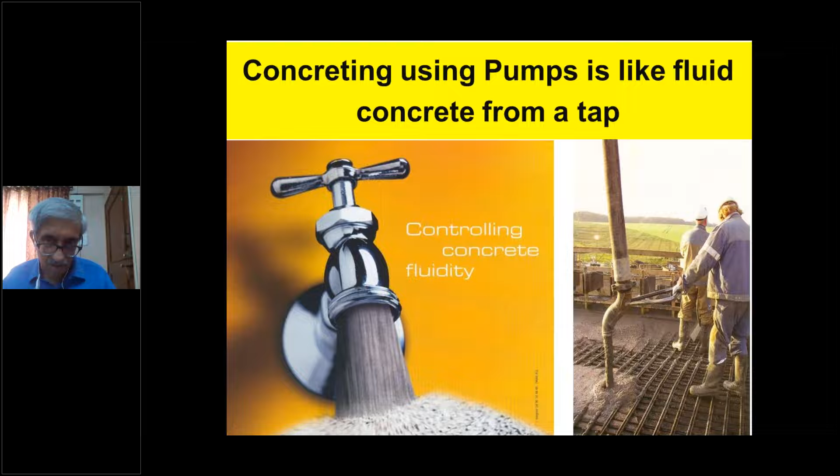So we got the first experience in India in 1979, when the first 500 thermal power plant of the Tata Electric companies, then called TEC, at Trombay, commenced. Gammon India was assigned the contract to carry out the major civil works.

The contractor manufactured, supplied, placed concrete using imported equipment from Germany, Switzerland, and UK, costing rupees 6 million, and the entire set was purchased by the Tata Electric companies, the clients of the project, which is quite unusual. People often depend on the contractors to bring their equipment, but here Tata Electric companies took a great initiative, for which many engineers benefited, concrete benefited, and we had a very strong and good construction done because of this initiative.

The following equipment was purchased: computerized batching mixing plant.

So we purchased a 60 cubic meters per hour plant, which was completely computerized, but it can be run on a manual mode like a normal concrete, ordinary concrete, where the operator has to press one button at a time for each ingredient, release the button when the adequate quantity by weight has fallen into the batching pan.

It can run on semi-automatic. One button is pressed and the concrete is produced by the computerized batching plant with the help of a data fed into it prior to starting the plant, and one at a time, 1 cubic meter will fall into the transit mixer below.

It can work fully automatic. It had the provision to do concrete up to 6 cubic meters, because in those days some of the transit mixers had a capacity of 6 cubic meters, the ones which we had purchased from UK, and therefore at times it was run fully automatic. If a smaller quantity than 6 cubic meters was required, it would be run under semi-automatic mode.

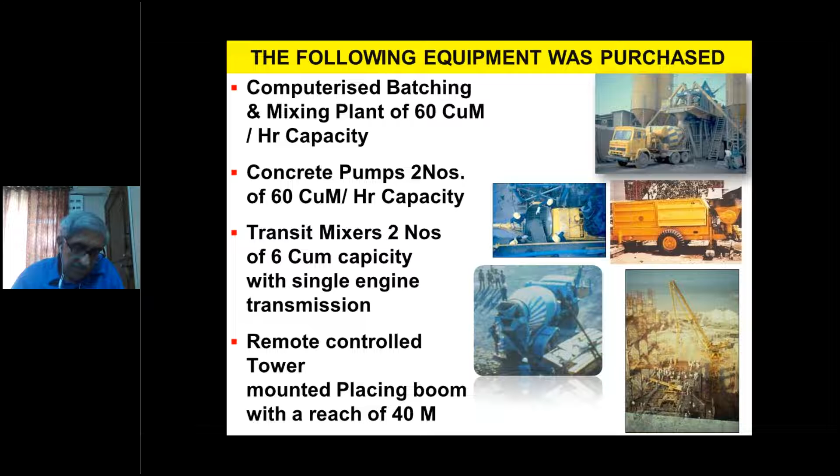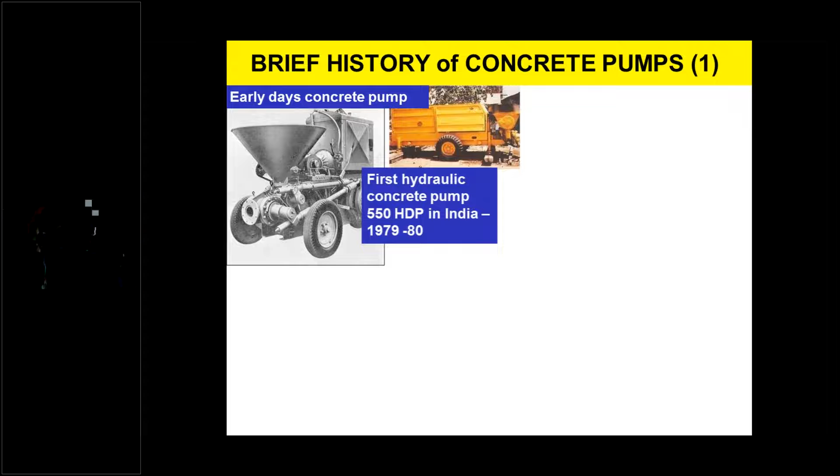If one sees the brief history of pumps, in the earlier days, pumps used for concreting in tunnels were mechanical pumps, just like our water pump. The early days' pump looks as if it is like a granite-crushing machine.

However, our pumps are run by a hydraulic system, and the entire hydraulic system controls the working of the pump. We had purchased 550 HDP, a very suitable size for India and capacity, which could pump even up to 100 meters vertical and 400 meters horizontal concrete delivery through concrete pipes, which are made of steel.

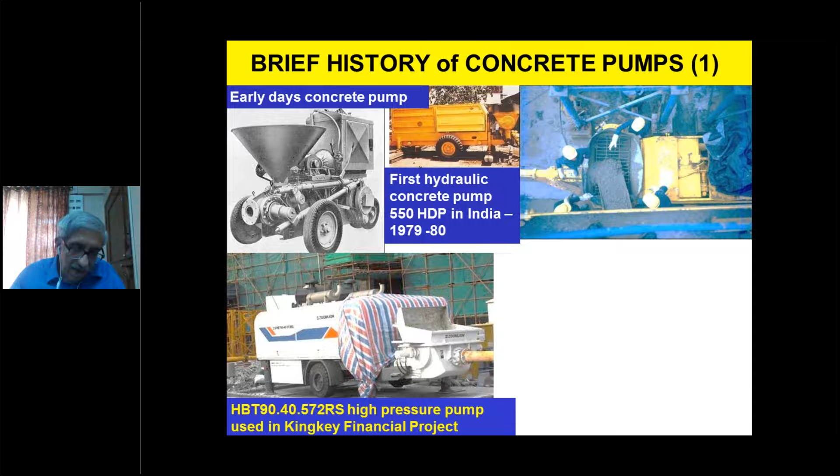As development advanced, in countries like China and Europe, higher structures were being constructed, so more powerful, highly pressurized pumps were used. First in the Kingkey Financial Project in China, supposed to be the 8th tallest building in the world, and later the famous Burj Khalifa was also constructed using Putzmeister's BSA 14,000 HPD super high pressure pump, which broke the vertical record of 600 meters in one go.

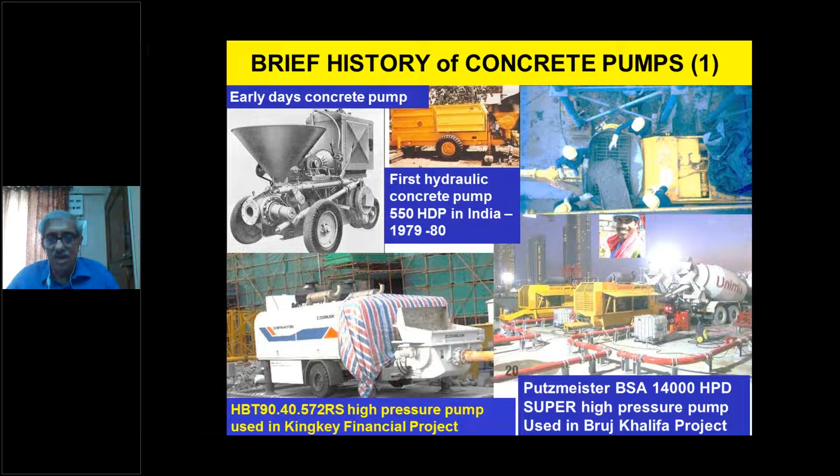Pumping is the only way you can deliver concrete both horizontally and vertically in one go. So, in my opinion, it is the most convenient way to do construction.

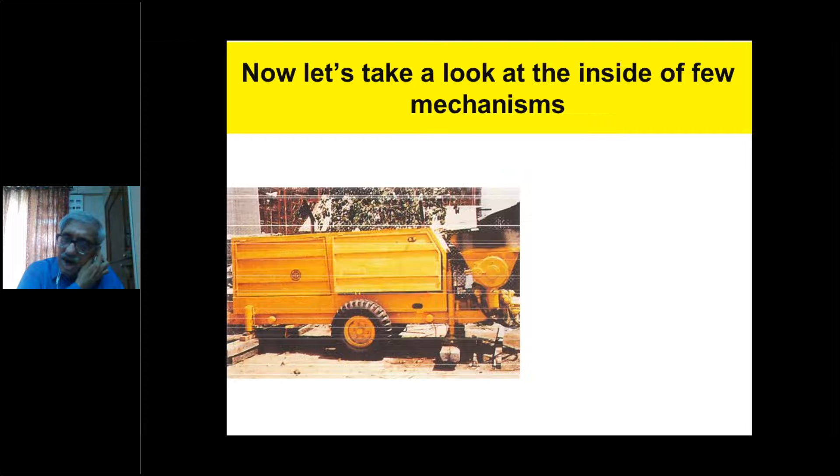If you take a look at the working of the pump, the flat gate valve system mechanism which we had in the pumps imported from Germany, from a company called Schwing, had a gate valve system and it worked quite beautifully. Even if an oversized aggregate goes past the grill on the pump hopper, it is sliced into two pieces by the gate valve. So the pump was very rugged, very good for rough and tough jobs.

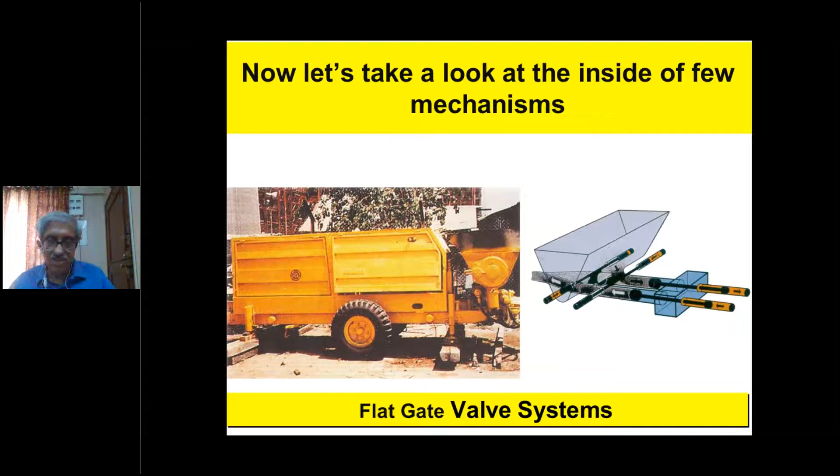Besides flat valve systems, simultaneously or a little later, other systems evolved, which I will show you. This is called a rock valve system, also called a Rock-Schieber valve system in Germany. Rock-Schieber means a woman's skirt, so it is shaped like a woman's skirt, going from the inlet piston to the outlet piston and conveying the concrete. You can see that sketch given on the side of the pump.

Now these were supposed to be mechanically well balanced as compared to...

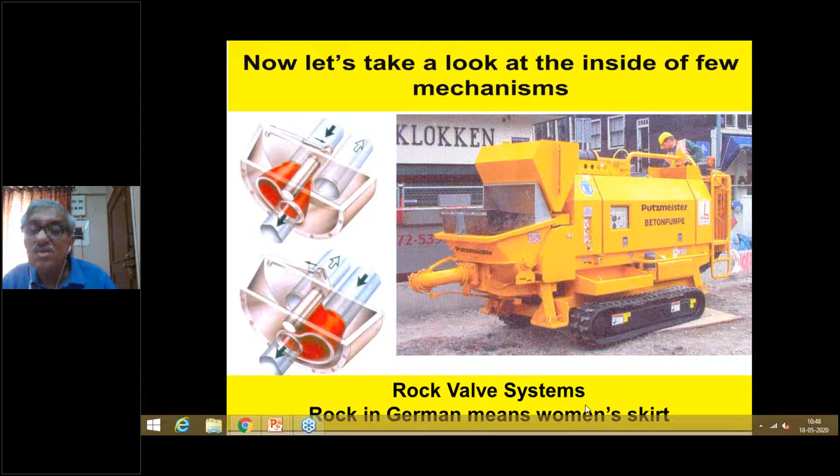There were also simultaneous developments taking place all over the world. We started concreting using pumps in 1979. I had the opportunity to visit some European countries like Switzerland and Germany, where these equipments were being made, and the Schwing people told me that the pumps we imported to India were the fourth generation. So already the fourth generation of hydraulic pumps had come in.

Further development took place when the truck mounted placer boom and pumps were evolved. They wanted a more compact pump, so they developed S-valve and C-valve systems, which you see on the screen. This came about when we imported the Elba pump from Germany.

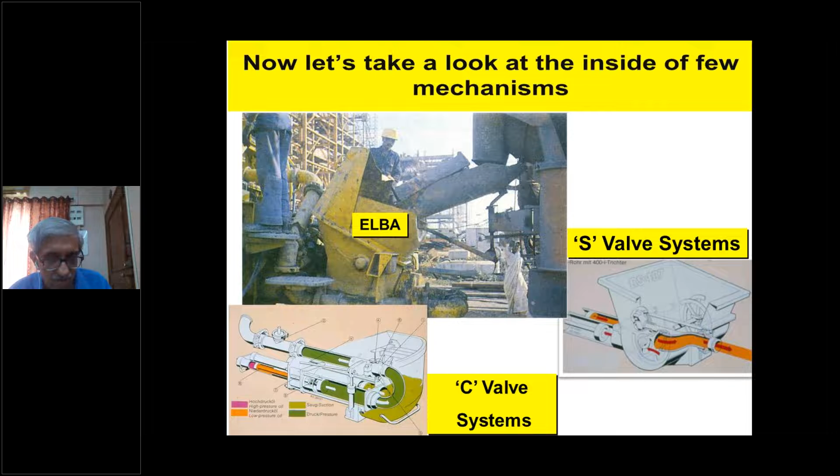The Elba pump had a boom placer of about 18-meter height or stretch, and a pump of capacity about 60 cubic meters per hour. On the screen you see the Elba pump being fed by the transit mixer, and it had a C-valve system which rocked inside from left to right, first sucking in the concrete and then pushing it out by the other piston.

A brief history of truck mounted pump and placer boom: in the initial stages, all bends were made up of flexible pipe like the one you see on the screen. Later on, there was a massive development of these pumps, and the flexible placer bends, which were giving more frictional resistance, were reduced, and steel bends were used instead.

Some time back, the largest boom was 62.5 meters with 5 sections, and the boom was of a diameter of 125 millimeters pipeline. These booms were very large, mounted on a 6-axle truck, and when they were traveling in Germany on their autobahns, which have no speed limits, they looked like huge dinosaurs on a racetrack, dangerous for smaller cars. Therefore they were banned and exported, one to Greece and one to Saudi Arabia, where there were lesser speed limits and it was safer for the other traffic.

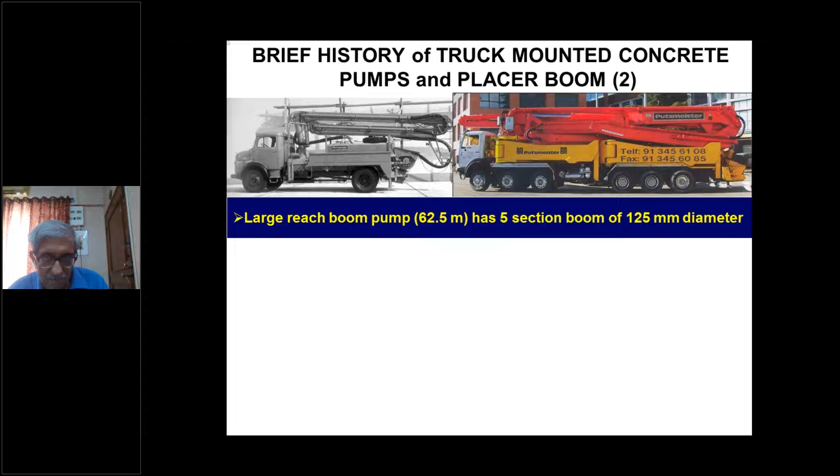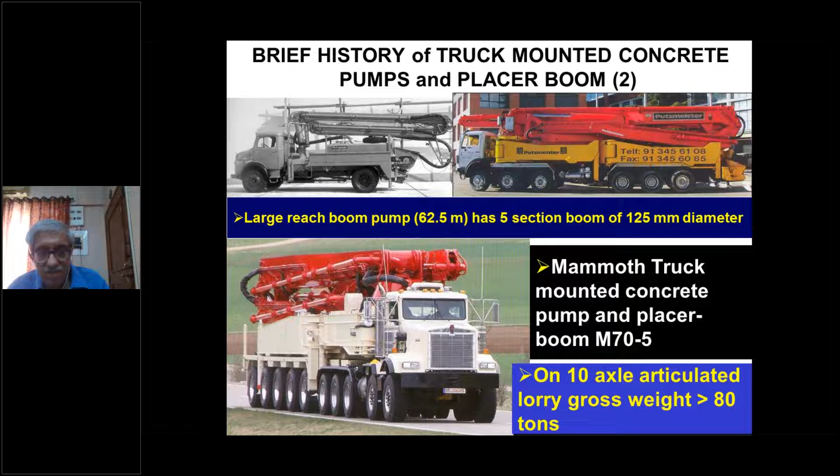Then came a bigger invention, a 10-axle truck with a mammoth placer boom, which could place concrete up to a 70-meter stretch. So friends, inventions go on, progress takes place, and the challenge to engineers is supported by these equipment suppliers, as taller buildings are being built and faster work is required.

One very good innovation took place in the meantime. We used to always observe that when we do the concreting with a placer boom and change its position, some concrete would fall down either on the reinforcement or on the human beings below, and it was a bit of a nuisance. So the Germans developed a folding system on the truck mounted placer boom, which can even be used on a tower mounted placer boom, which squeezes the outlet pipe when you are shifting the placer boom. Otherwise, the valve opens up and allows the concrete to flow when you are actually doing concrete work.

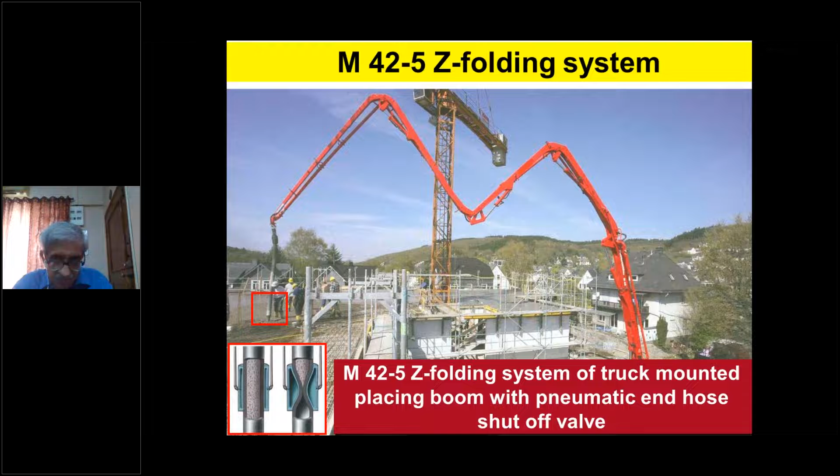We had a big problem of training the operators, because once they got a bit trained, within a month or two, they would get exported to Saudi Arabia or Dubai or various other more lucrative places. It was very difficult to retain these operators for a stretch more than 2 months.

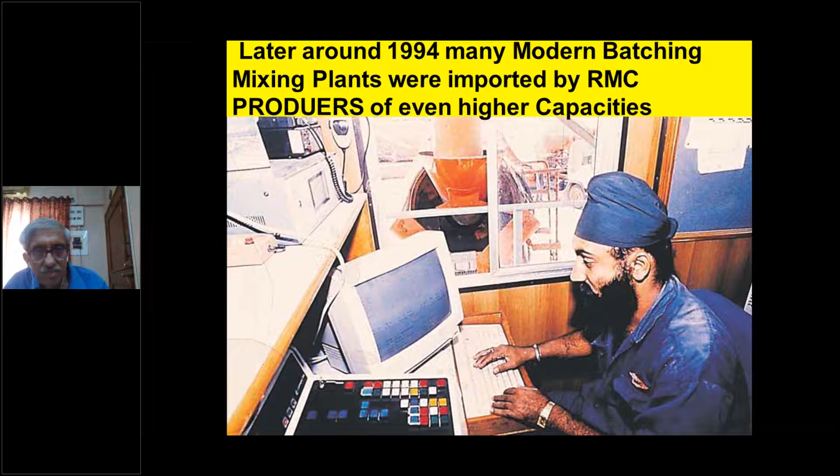These batching mixing plants had electromechanical weighing systems which were very accurate, totally unlike our weigh batching systems in India, indigenously made, which used to go repeatedly out of order, or we had to repeatedly calibrate them. These were very accurate and dust proof, and therefore gave much better quality.

The admixture dispensing system in the batching plants or RMC plants could batch at the most 2 or 3 admixtures at a time if they wanted to. Generally, a single admixture was used during our days for dispensing, and the operator could look at the dispensing jar to check whether the correct volume is going in, as indicated on the mix card in the computer.

Besides our batching plant, our plant had a pan mixer, and you can see the fins of the pans are distributed at an angle, and the arms are of different lengths. So within 30 seconds, 1 cubic meter of concrete is mixed, and within 30 seconds, 1 cubic meter is batched. So the total speed of the batching plant is 1 cubic meter per minute.

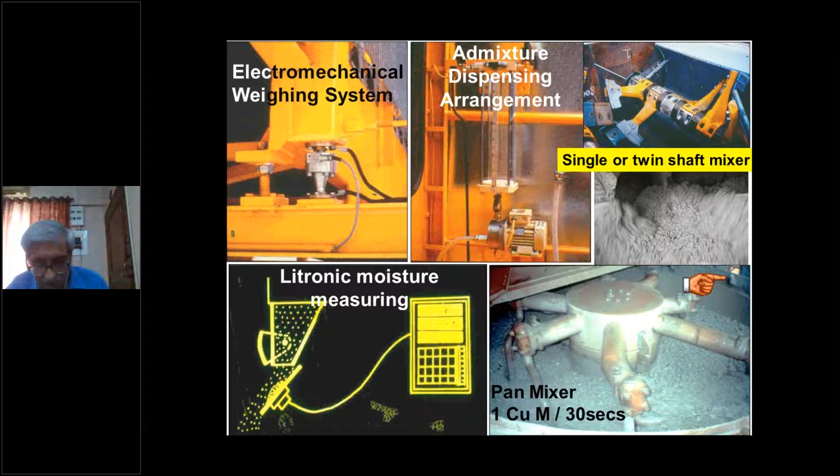Further development took place, and the pan mixer was fixed with an agitator. As the agitator revolved, it also spun and gave good performance. This is another view; on the right hand side you see the twin shaft mixer. Now, when there are very difficult mixes, like a mix with very stiff or low slump, then this pan mixer with agitator was being used. It has still not come into India, but is being used abroad.

Not only are stiff mixes difficult, but self-compacting concrete mix is also difficult. Mixes using fine and ultra-fine material in high proportion are also difficult mixes, and mixing is difficult when you have large aggregate size. So all this was resolved and solved by the pan mixer with the agitator.

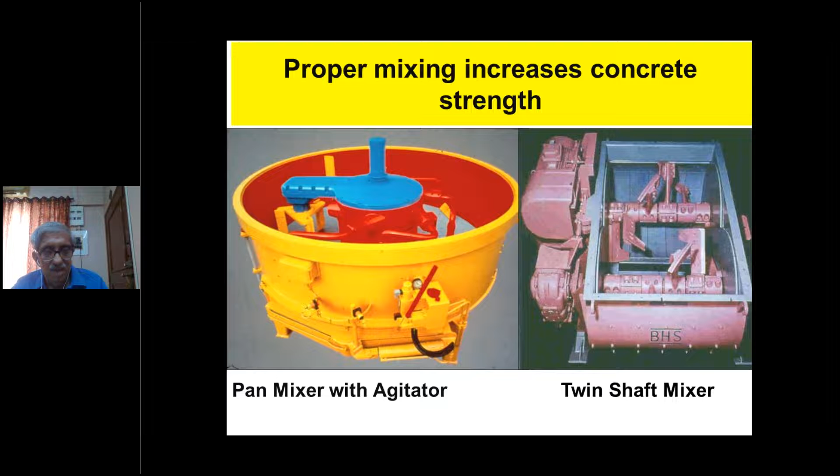Now just a few lines on materials. If you are using rounded shape aggregate, it is preferred. In India, generally we use crushed aggregate, which has an abrasive effect on the pipeline of the pump, the hopper of the pump, and the transit mixer drum, as compared to the rounded shape.

Many engineers feel that gravel or rounded shape aggregate should not be used because it is smooth on the surface, and there will not be very good bonding between the mortar and the rounded aggregate as compared to mortar and crushed aggregate. But this is a wrong notion. We used to use mild steel bars which were even smoother than rounded aggregate, but the concrete still had a good bond with it. Also, the world record of use of rounded aggregate is up to 90 megapascal strength.

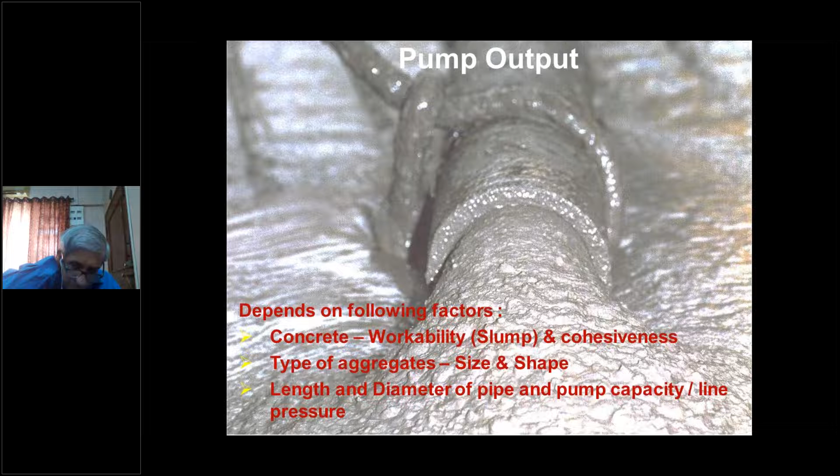Pump output will definitely depend on the workability - that is the slump and cohesiveness, the type of aggregate, the size and shape, the length and diameter of the pipe, and the pump capacity or line pressure. Every pump has a capacity for a certain line pressure, and if that capacity is exceeded, the pump will automatically get choked.

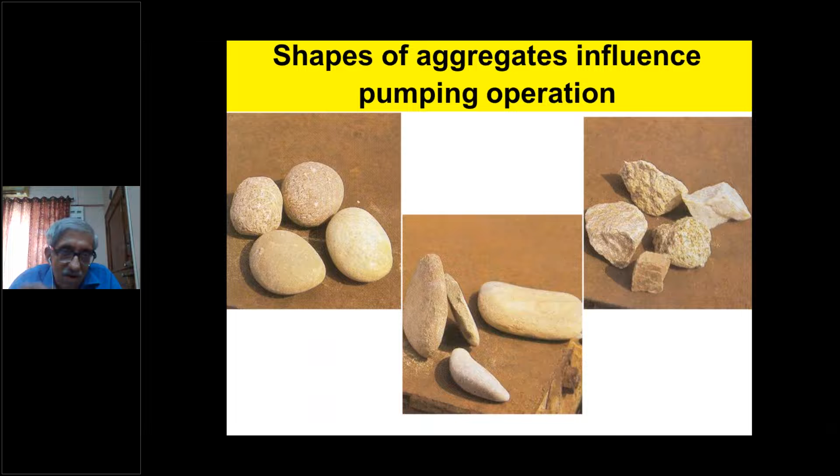I'm showing you a few aggregates of different shapes. In European countries, high strength concrete is still made using gravel or rounded shape aggregates. In India, crushed aggregates are preferred because you very seldom get rounded aggregates, except in the north where gravel is available, and if it is oversized it can be crushed. In Trombay Unit 5, we also used gravel, and all the oversize was screened and kept separately, then later crushed. So we got a semi-rounded, semi-crushed surface, and we had to make a mix design estimating the rough type of surface as compared to the rounded surface one used to get.

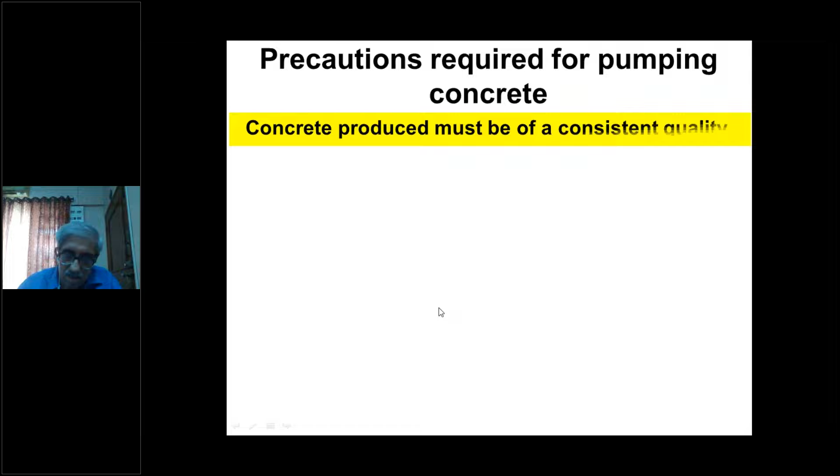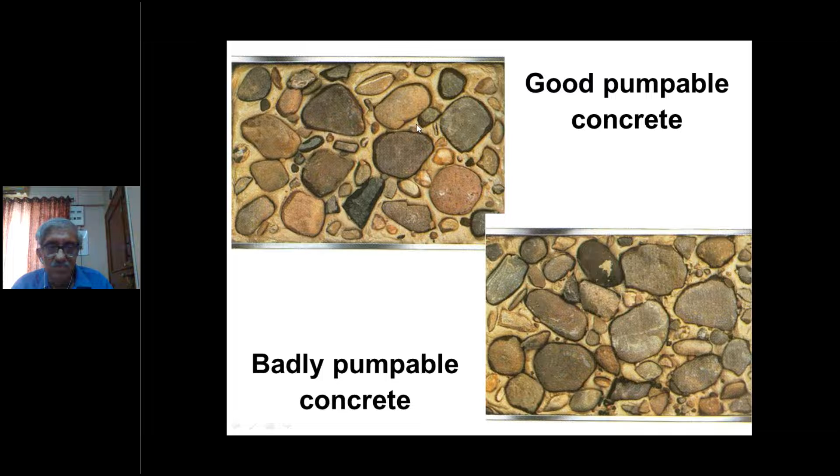A good pumpable mix looks like the one on top - it has a nice coating of mortar around it, and at the surface the mortar works as a lubricating agent. The badly pumpable concrete looks like this, where there is a lot of clustering of the aggregates. These days we are very used to the problem of COVID, so you have to have a safe distance between the aggregates to have a good pumpable concrete, and not the other way around.

Precautions required for pumping concrete. Concrete must be of a consistent quality, and that is very difficult to get because many times the materials which we put into the concrete are not of consistent quality. So again, you have to go to the source and get consistent quality aggregates, consistent quality cement, water, and other ingredients.

When concrete is put in a pipeline under pressure from one side, the resistance comes from the roughness on the surface of the pipe, which is also supposed to be very smooth inside. But when the concrete column gets squeezed, anything you squeeze, the juice comes out, and the juice of concrete comes out and acts like a

frictional resistance or lubricant between the concrete column and the pipe surface. So when you design your mix for pump concrete, you have to give more thought to the fines, ultra fine material and the fine material which you use. Sometimes fly ash is preferred because fly ash also has rounded particles and will give better lubrication. Slag is preferred because it also has calcium oxide, and you can use greater addition of slag as compared to fly ash.

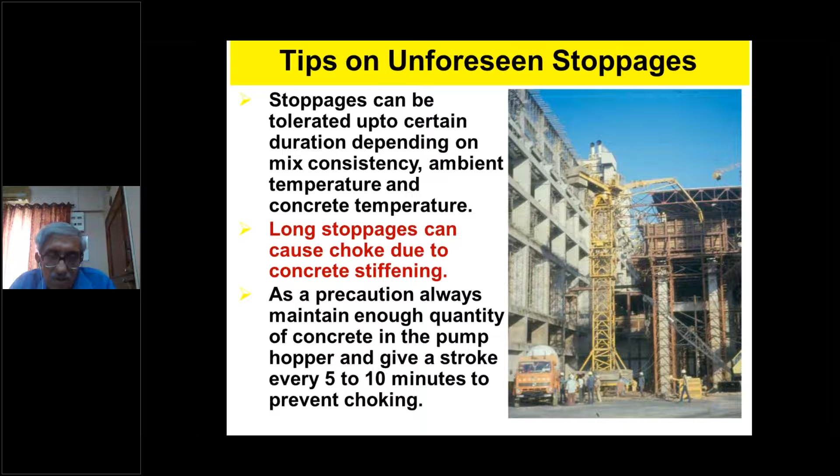The choking occurs because it is recommended that when there is a stoppage, every 5 to 10 minutes, one stroke of the pump should be given to prevent a permanent choking in the pipeline. But if there is not enough concrete in the hopper, then this particular problem will be there, that the operator won't be able to give enough strokes till the reason for stoppage is rectified. And if it is a very long duration, then you are in trouble.

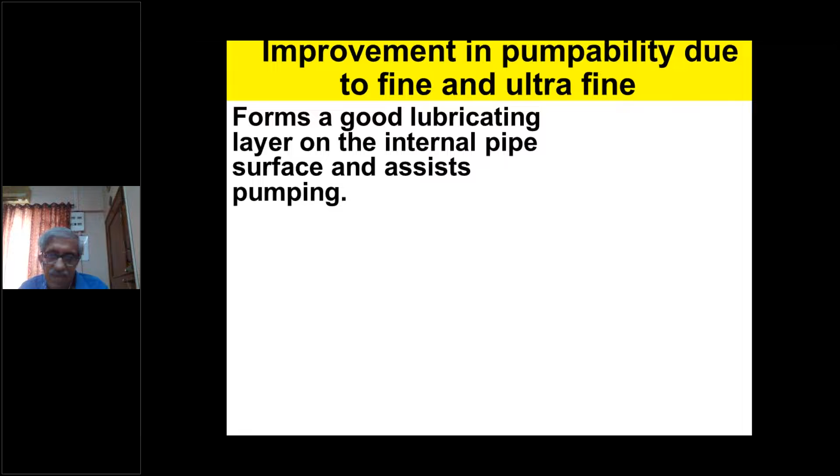Improvement of pumpability due to fine and ultrafine material. Ultrafine material forms a good lubricating layer on the internal surface and creates a very good lubricant to assist pumping. It reduces wear and tear of the pipeline, and chances of stiffening in the pipeline are also reduced.

This was tiring work for the pump operator, and therefore he used to resort to shortcuts of removing the grating. Once the grating is removed, there are chances that oversized aggregates, some material like a wooden piece or a cloth piece, may enter the pump and damage the valves.

This grating is meant to arrest oversized materials, and it's put for the safety of the pump operator, because if he accidentally puts his hand inside, there is a blade rotating inside to churn the mix so its consistency stays constant and workability remains good. In spite of several requests to pump operators, they would remove the grating, so we had to weld the grating to the pump and cut the weld whenever maintenance was required.

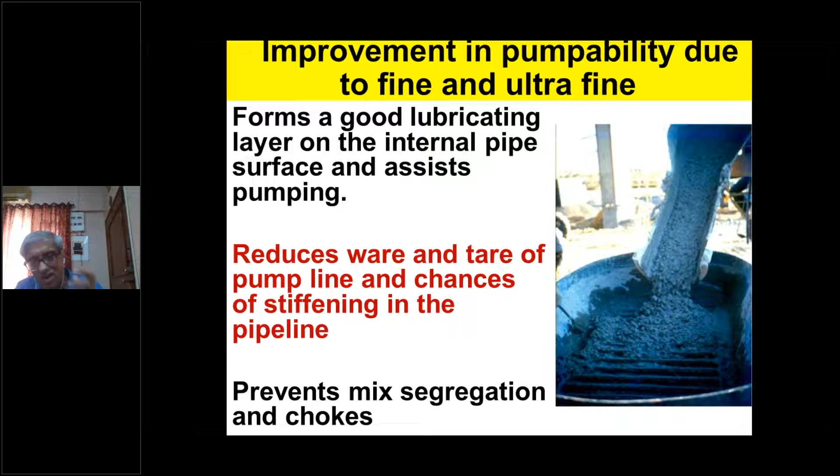A brief history of transit mixers is necessary. When the RMC concept came in, the mix needed to be transported. We could not transport the mix in a truck because there would be vibration, and any jumps on the road would cause the mix to segregate. Then feeding a truck carrying concrete mix into the pump is very difficult, so these transit mixers were developed.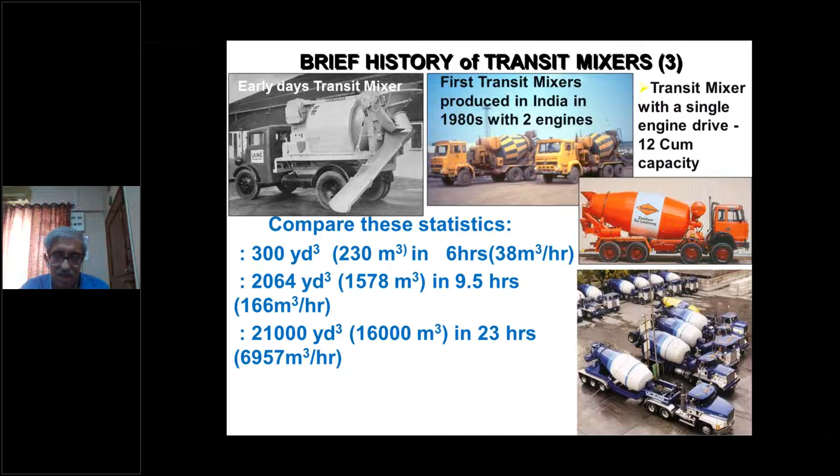Just to show you the advances made in transit mixers, you can see the photograph—huge transit mixers on trailers of much higher capacity. I'm not sure exactly how much, but it could go up to even 30 cubic meters.

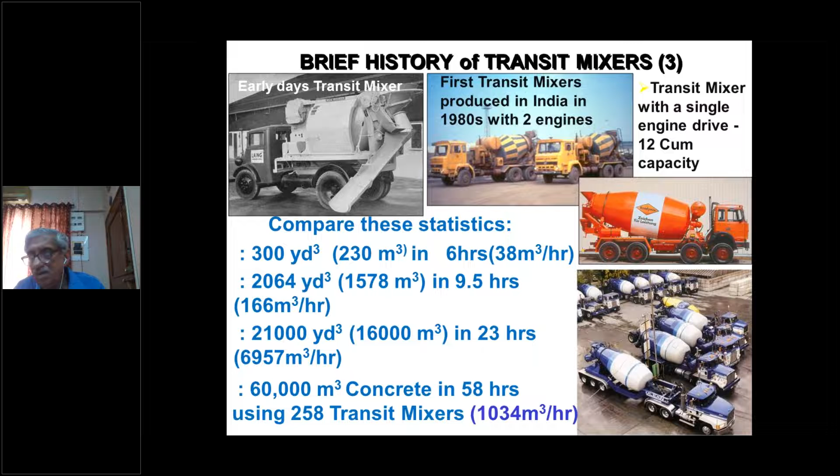One of the records of large concrete pumps: a huge concrete quantity was done in 58 hours using 258 transit mixers at the rate of 1,034 cubic meters per hour. This record was achieved by the Second Financial Center in Shanghai, which is, I think, about the fourth or fifth tallest building in the world today.

A little bit of mechanism we should know: it's like a screw conveyor. The screw is mounted inside the drum of the transit mixer. When it rotates in the clockwise direction, it agitates the mix. In the anti-clockwise direction, it unloads the mix.

But this mixing is very inefficient compared to batching plant mixing. So we say that mixing is not enough—only agitation can be done, so that the mix consistency and workability do not fall down to a great extent.

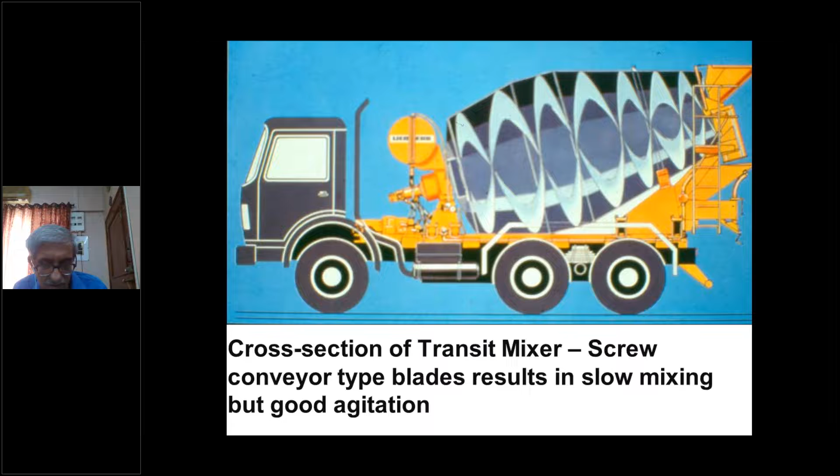It's very simple to operate. It operates on a 3-lever system at the rear. Sometimes the operating systems are in the driver's cabin only, so the driver can operate it sitting inside, and you don't need an additional person to operate these levers.

The first lever is for adding water if you need excess water stored in the drum. The second lever increases the revolutions per minute of the transit mixer, in case when the transit mixer arrives at site they need to speed up the revolutions so the mix gets properly mixed. And in case the engine is not able to take the load, a third lever is kept to raise the engine power.

The sound the truck engine makes to raise itself—we often notice it during a signal on the road. When it changes from yellow to green, the trucks are all ready to move and they raise their engine, trying to overtake other trucks or vehicles on the road.

Some of the specifications in the world, the standards ban carrying water in transit mixer drums. In India, it is still allowed, and I think because of the hot weather, they may need a little excess water to be put in the transit mixer. But then at the batching plant, they should put less water, otherwise the water to cement ratio will change and you will not get the desired durability.

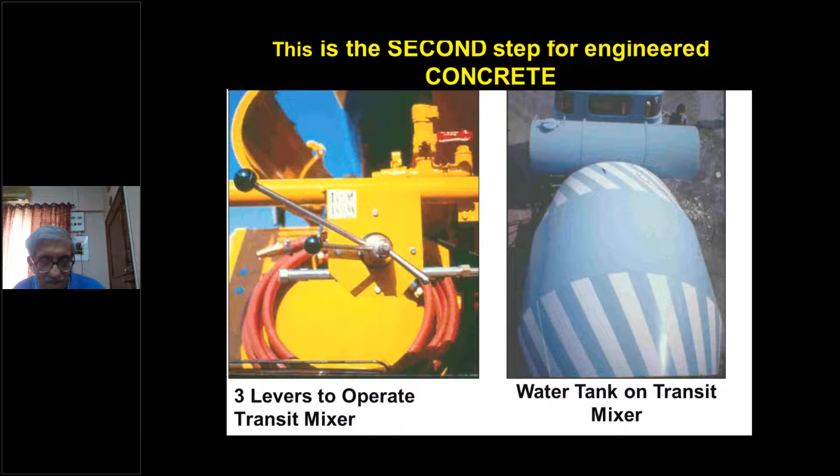Even at times, admixtures are added along the journey, which I have already said can create the problem of the concrete not setting, and this could have serious implications. The RMC operators may not get paid for it, and even if they get paid for it, they will have tension moments for the next 7 days.

A twin fin transit mixer has been developed. It is used in many European countries. It is an excellent substitute when you use only batching plants without any mixers. This mixer can agitate and mix the concrete as efficiently as the batching plant, pan mixer, or shaft mixer.

Another thing is, if the mixer is traveling a shorter distance to the site, then this mixing is enough, because within say half an hour or 10-15 minutes, as the transit mixer reaches the site, the mix is ready to be pumped.

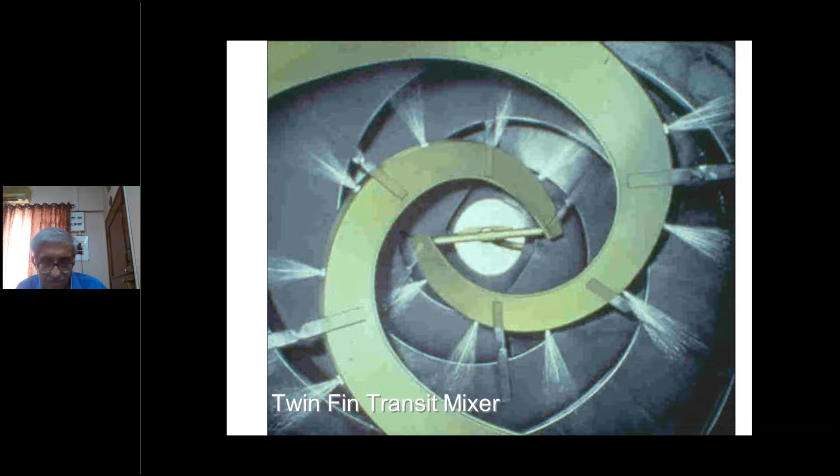Now this is an excellent view of our Unit 5 turbo generator, which is ready for concrete concreting.

So this is an excellent view. You can see the tower mounted placer boom pumping concrete. The truck mixer, one pump is here and the other pump is here. Two pipes are connected to the tower mounted boom. One of them is a standby pump. Only one is working at the moment, because we could comfortably get about 40 cubic meters per hour, which was required for placing the TG deck.

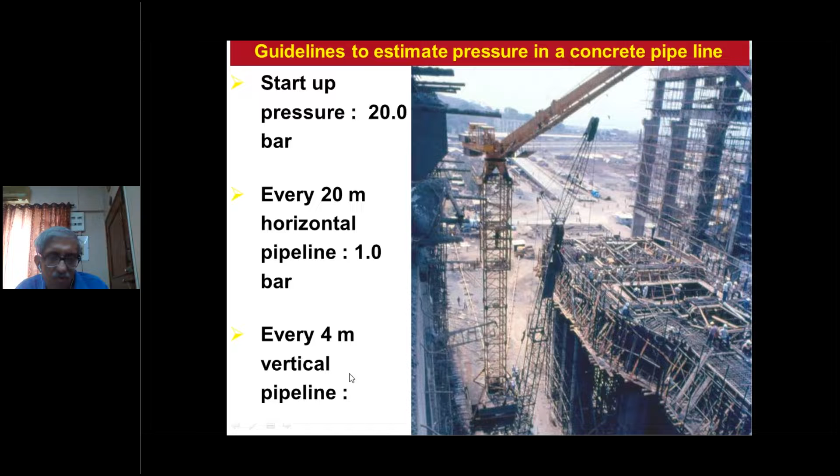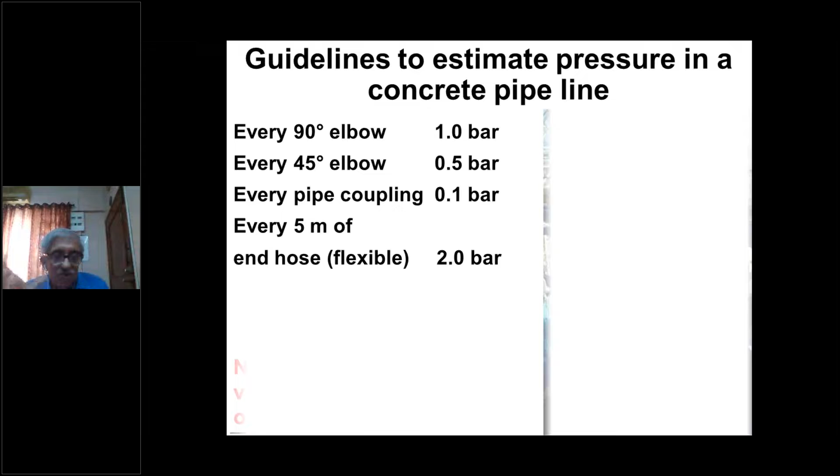One important thing is, you must always cross check the bar pressure and the pressure due to various arrangements you have made on the pipeline: how much is the vertical pipe, how much is the horizontal pipe. For every 20-meter horizontal pipe, 1 bar pressure will come, and for every 4-meter vertical pipe, 1 bar pressure will come. The startup pressure will be 20 bars. Each bend will have a different pressure, pipe coupling will have a different pressure, and the end hose will have a different, higher pressure because it's a flexible hose. The most important precaution is to total these pressures and keep the safety valve operation at 90% of the set pressure.

The hydraulic systems all depend on the pressure. If your pressure exceeds the safe pressure, there is a likelihood that the small pipes conveying the hydraulic oil to different parts of the equipment may fail. As a result, there will be serious maintenance involved and stoppage of work.

Even our compression testing machine, which also runs on the same principle of hydraulic pressure, has to be set at 90% of the safe pressure, so that no unforeseen stoppages or bursting requiring replacement of pipes take place. So always keep a 10% allowance on your bar pressures.

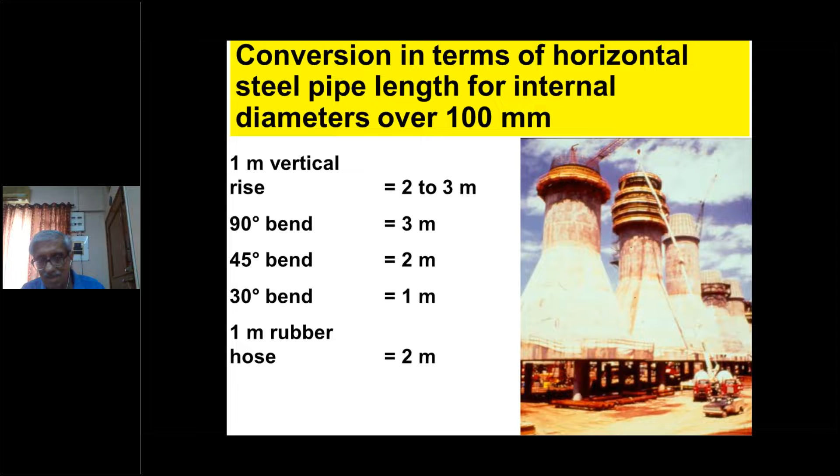On the screen you see a photograph I have taken from a magazine. These are bridge piers being cast in USA. One lesson I want to convey is that the pump should be approachable from both sides. Many times we plan our pump placement so that only from one side can transit mixers come and feed the concrete. Should that one approach get blocked or waterlogged, your entire pump operation will get disturbed. So the pump should be positioned in such a way that from both sides the transit mixers are able to feed the pump.

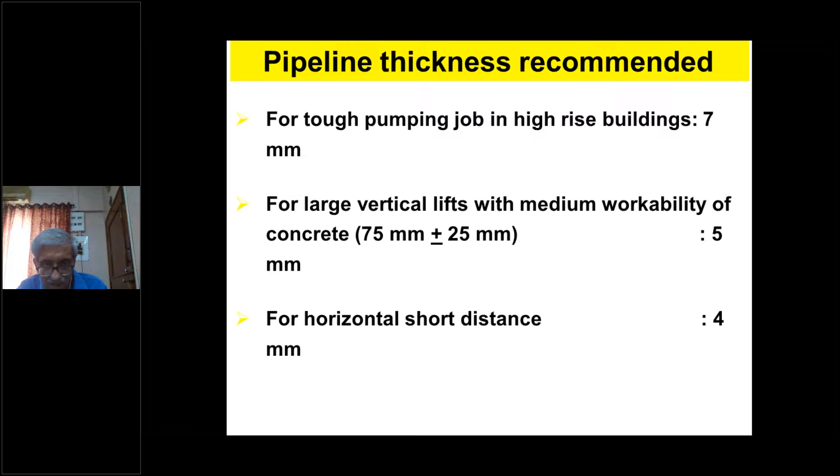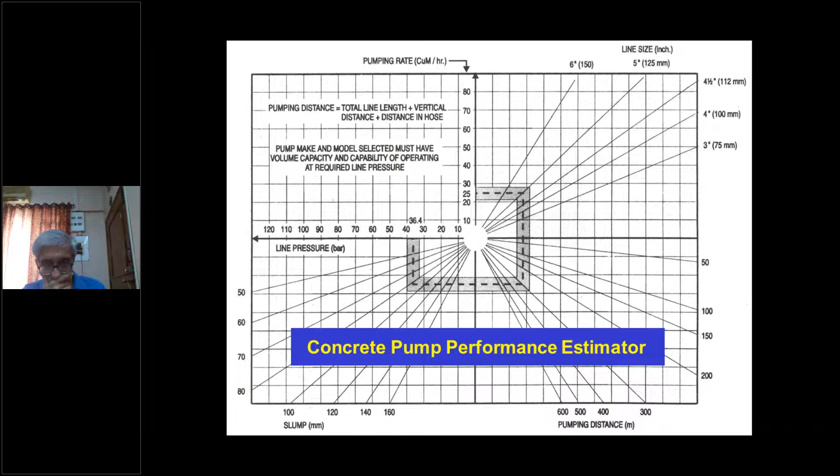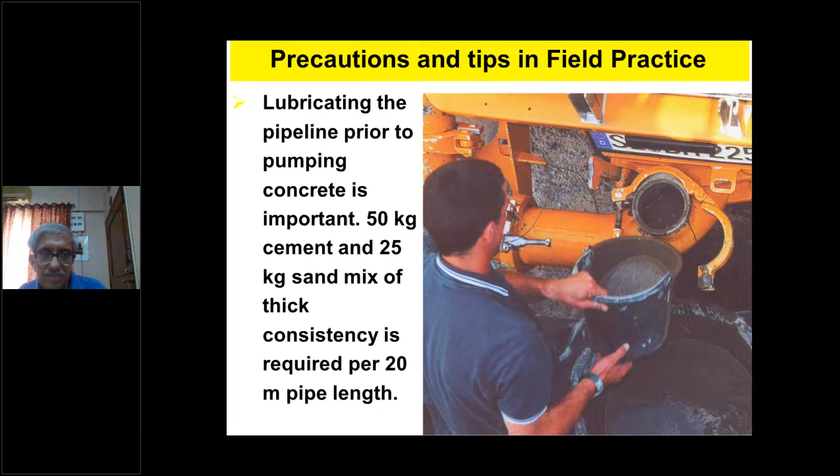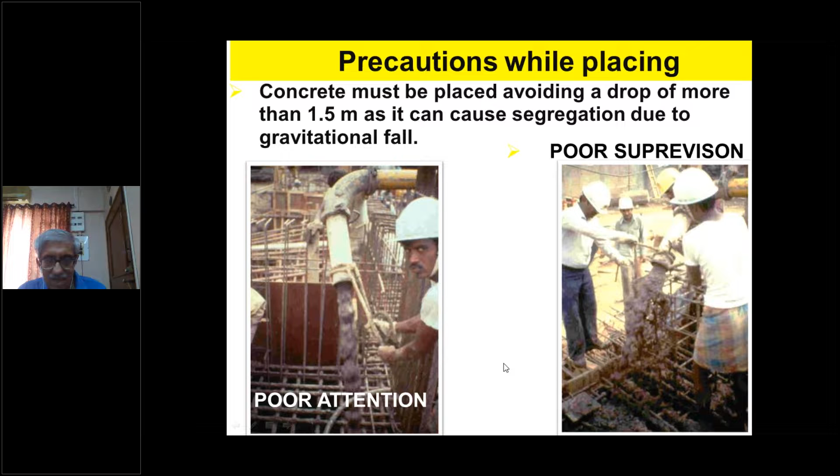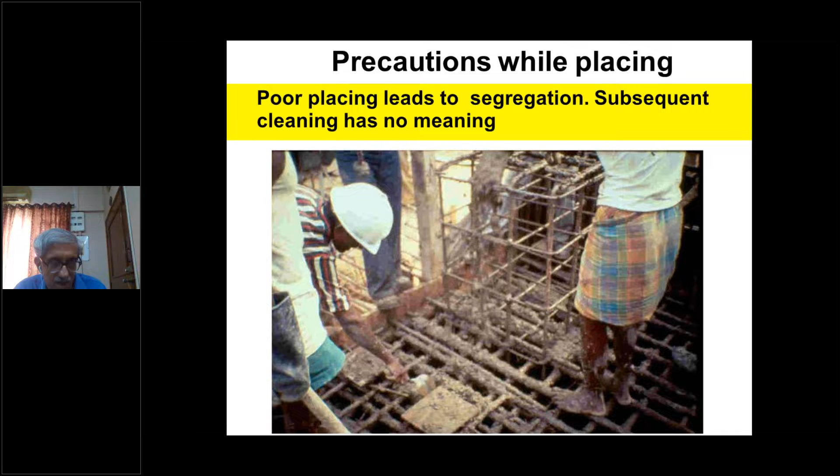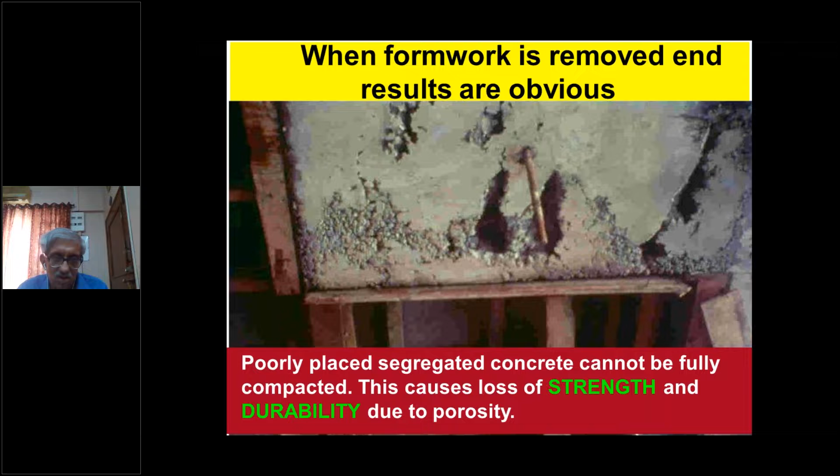But these are almost resembling rat holes. Of course, some honeycombs are also there. And this concrete would be very weak because of the voids. So loss of strength and also due to porosity, loss of durability.

How to do your concrete correctly in deep foundations? There should be adequate spacing between the reinforcement steel and the pipe sleeves which you place. The internal diameter of the pipe sleeve should be about an inch larger than the hose pipe of the placer boom. Then it can safely go inside.

At the ends where there is a cover to be maintained, if it is a 60 mm cover, proper 60 mm bars should be put, and the spacing between the reinforcement steel should be more than 60 mm, almost a little more, so that the needle vibrator, which is of 60 mm diameter, can comfortably go inside.

If this does not clear the density of the reinforcement, you are allowed to bunch the bars. Preferably avoid any horizontal laps at one place. You can stagger the laps. Alternative is also to use bigger diameter bars instead of many smaller bars. So this will permit you to reduce the segregation and have a more comfortable way of concreting.

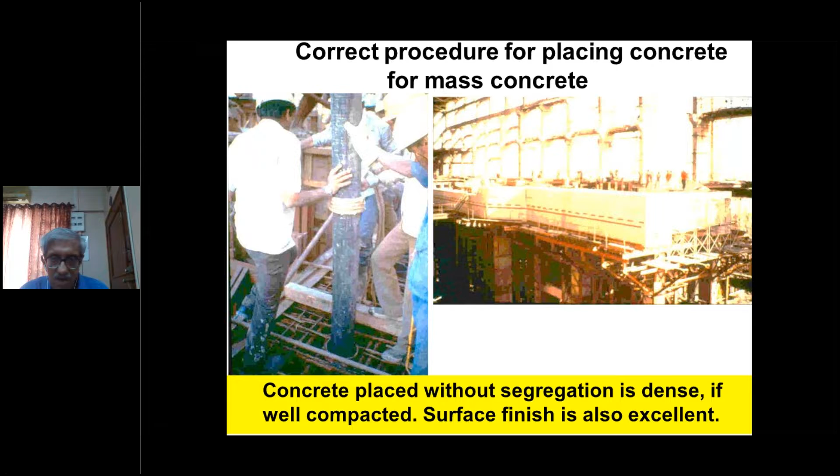In Unit 5, we were not that successful. A lot of expenses had to be done by way of repairs. And in Unit 6, we did a good job from the previous experience. We covered up all the defects, likelihoods of defects, etc. Trained the operators properly, planned the reinforcement much before it was placed on the site, and therefore our efforts were rewarded. With good quality concrete, we got also good quality finish.

Cold joints often come, and the problem in Unit 4 was whenever we did large pours, the workers struck and requested the management for higher wages, and otherwise they would abandon the work. So there was always a threat of a cold joint taking place.

Cold joint, especially in foundations, is dangerous because it can be a source of leakage and later on cause corrosion to the bars which are put in the foundation. In the superstructure also, it can cause a problem of durability.

However, in reinforced concrete structures, there is no danger of a cold joint causing a collapse of a structure because the bars can take enough shear and protect the structure from actually collapsing. But cold joints, as far as possible, should be avoided. Some places you can't avoid because whenever you are building concrete in stages, you have cold joints at every stage.

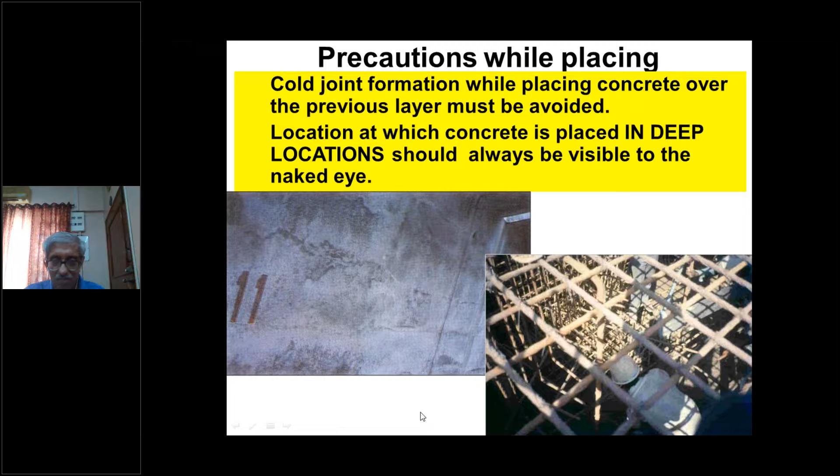Big columns were a challenge to put. We did 14-meter columns in Unit number 6 in one pour because the specification of the turbo generator stated that the TG deck should not have a joint. The columns of the TG deck, there were about 16 numbers, should not have a joint. These columns were almost 2 meter by 2 meter.

They're very densely reinforced. This is the reinforcement not yet completed. It is still going on. Here it is still less.

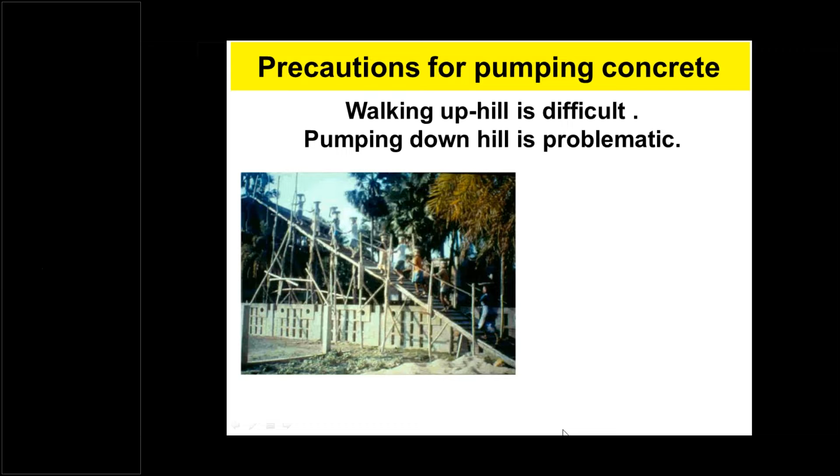So one had to use the placer boom which goes right down to the bottom and then retrieved gradually as the concrete quantity went on piling up in the column. This prevented segregation. This also prevented repeated use of formwork, etc. The vibration was done through windows which were put at predetermined locations, and therefore we got a very good finish, and we could do a 14-meter column densely reinforced with proper arrangements.

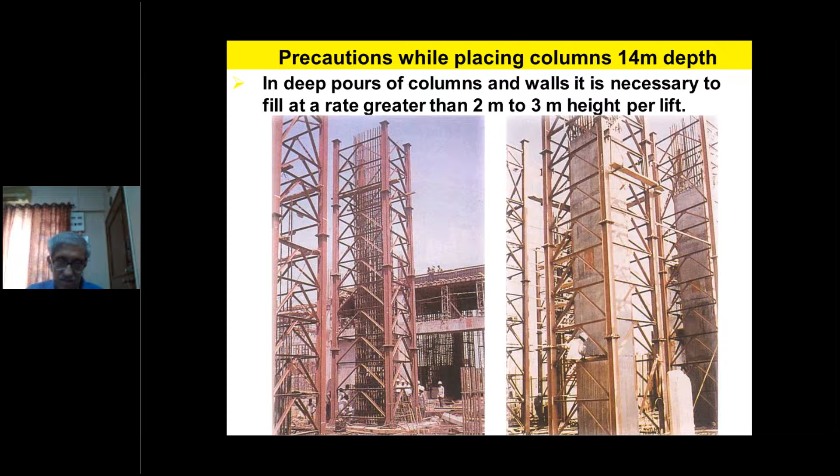Walking uphill is difficult, but pumping downhill is problematic. We tried this in one of our hydro stations where the anchor blocks had to be concreted, and there were massive anchor blocks. So we positioned the pump on the upstream at a higher elevation, thinking that with gravity the pump will pump better.

But no, sir. The problem is many a times the concrete just slides down and creates air pockets, and many a times you see even in water lines we get airlocks. So we started getting airlocks and the concrete pump would not pump. Ultimately, we decided to pump from the downstream and upwards into the anchor blocks, and that worked beautifully because our pumps were quite powerful and we could get the mix to go very easily.

Now what happens is when you are doing downstream pumping, down the slope, and putting the initial mortar for buttering the pipeline, the buttering only takes place in the bottom half. So the top half of the pipe does not get buttered, and that eats away the mortar of the subsequent concrete and chokes the pump.

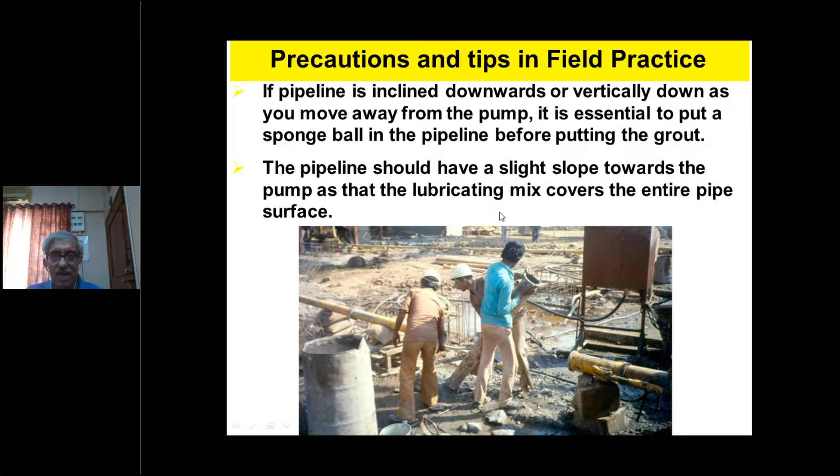In general, if the pipeline is inclined downwards or vertically downwards, it is essential to put a sponge ball before putting the grout or the buttering mix. The pipeline should be given a slight upward slope towards the pump in normal circumstances so that the lubricating mix butters the entire surface in the pipeline.

Another precaution is that the clamps and the joints should be properly sealed, as under pressure they will start leaking and the water or the finer material may seep out of the pipeline.

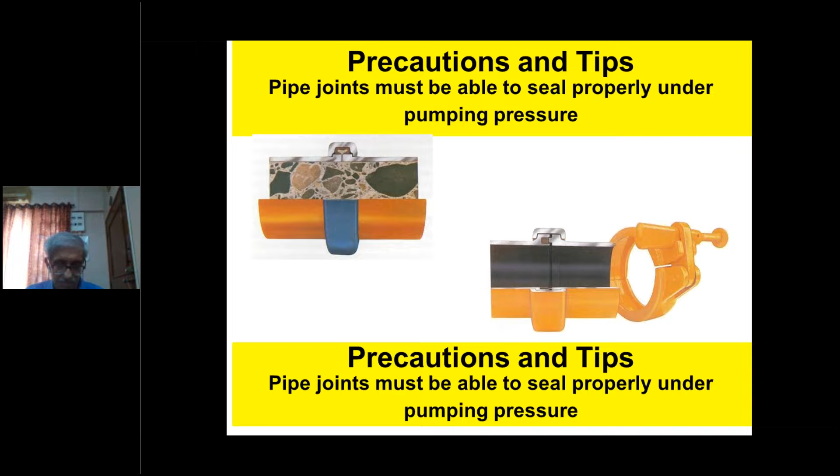Don't use unusually long rubber hoses like one being used here. There might be kinks inside, and as a result they could have a choke. So it is very important that long end hoses and hoses with large diameters are not suitable for concrete distribution.

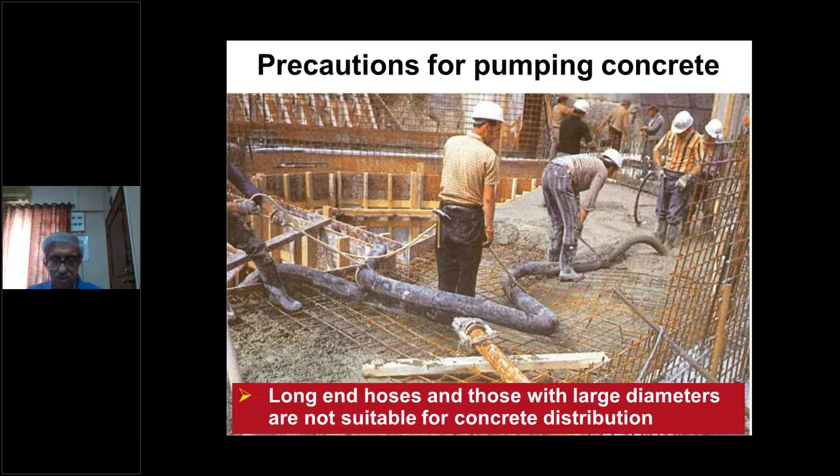Then suddenly it struck me, I asked the site engineer, what is the distance of the pump from the vertical bend? And he said it is almost flush to the structure. I said, then you have made a mistake. You should put it away from the structure, at least 10 to 15 times the height of the pipe. Then he said, sir, then the pipeline length will increase and the pump will have all the more difficulty pumping the concrete. I said, no, you try it out.

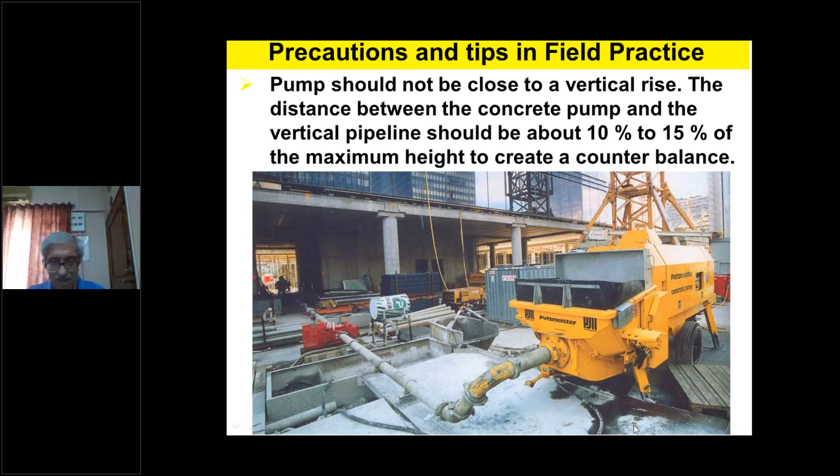But this is a very simple way. You can avoid the pump getting unworkable, you can say. It's not choked, it is working, but it is unworkable, not allowing the pump to this thing. In case of very big heights, you can have a hydraulic valve connection, which is also controlled by the operator. Once he pumps, he again stops, pumps, again he stops the valve, etc., so that the sliding effect does not take place. But for a small height, it can be easily avoided the way I have recommended.

Reasons for blockages while pumping. There could be many reasons. The stoppage of concrete supply for a long time and the concrete has become stiff. As soon as you have this problem, please empty the entire pipeline and clean the pipeline, otherwise that pipeline will not be usable for the next pour. Defective concrete mixes. Each and every engineer at the plant and on the site should know how to design a mix and how to rectify a mix when the concrete work is in progress, in case necessary. For that, of course, a training session is necessary on the mix design and also on the concept of concrete pumping. Failure of the pump.

Very rarely does the pump actually fail. Mechanical failure does not occur. It may be sometimes that because of excessive pressure, the hydraulic component of the pump may have failed. So therefore, you have to have only 90% of the pressure which the pump can increase, and that is adjusted by the safety valve in the pump. That must be done.

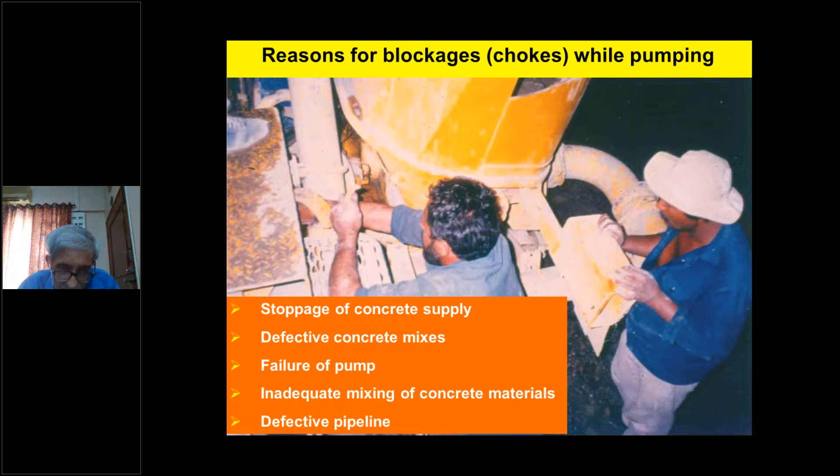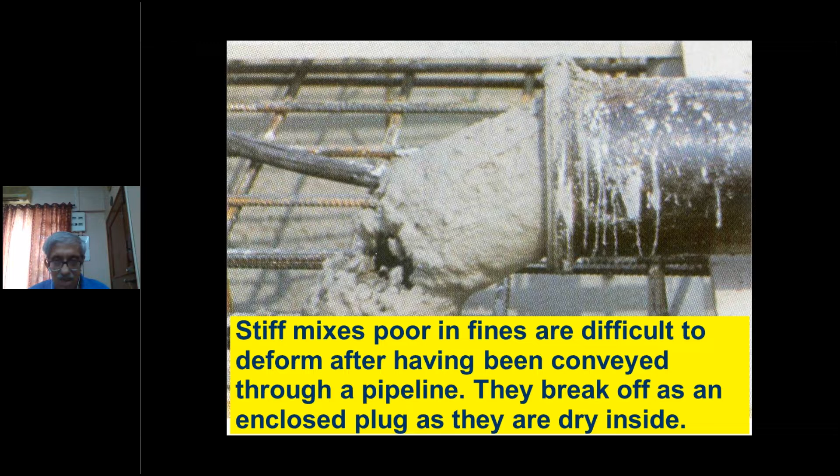You can see here, with a stiff mix, the entire concrete comes out and falls like a lump outside the pipe, and then after some time the pipe will get choked. So this is because the mix inside is dry; outside, it has formed a plug-like concrete, and therefore there will be a problem.

So we investigated all the causes. The first is, if the aggregate is porous and dry, generally people don't wet the aggregate before putting it into the mixer or batching plant. It is very important to let the aggregate absorb water so that it is surface dry at the most, or maybe having some water on its surface which you can correct as moisture.

Another good thing it does is, we learned in physics class in school that evaporation causes cooling. So if the aggregate is hot, having taken on the black color in hot sun, it will also get cooled down.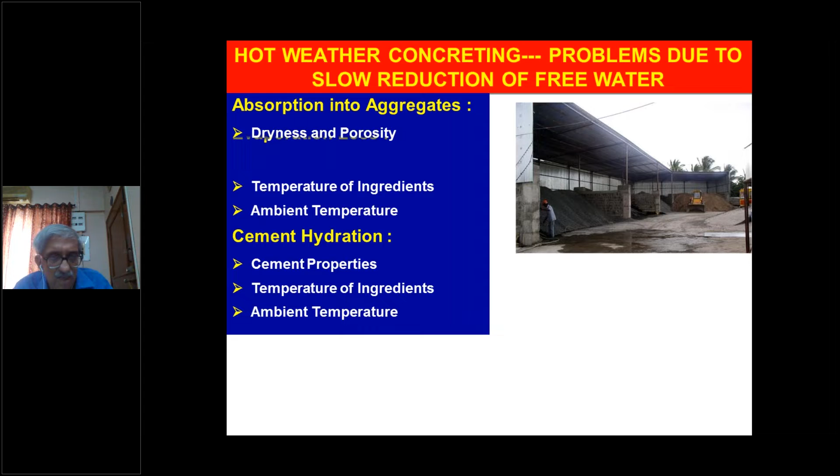The next important thing is cement hydration. Cement starts hydrating the moment it gets in touch with water. Cement, if it has a higher C3A content, chemically will harden faster. If it is a finer cement, it will harden or consume the water faster and lose workability. If the temperature of the other ingredients is high, cement will hydrate faster. If the ambient temperature is high, so that the pipes also get heated up along the pumping, the concrete inside will harden faster.

So what you do is cover your pipe with a Hessian cloth and sprinkle water continuously, so that water evaporates from the Hessian and cools the pipeline, and in turn the concrete inside gets protected.

If it is traveling in a transit mixer, you can see the type of transit mixers they use in the Middle East, in a desert, hot dry climate, is to have a canopy with a small gap between the drum and the canopy, so that when the transit mixer is moving, the air circulates and provides insulation. Even the tank used for extra water is also protected, as you can see here, with a circular covering.

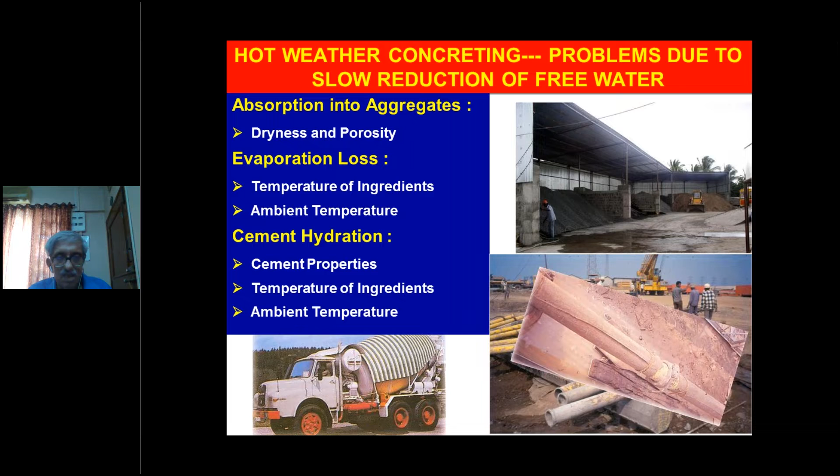So these are the important things one has to take care of in hot weather concreting. Now we come to almost the end of the lecture. The last operation, just like in concrete, is curing, and it's very important - people often forget to do it.

But concrete will tolerate it to some extent. Cleaning of the concrete pipeline, you can never forget to do, because next day you won't be able to pump the concrete. So one has to clean the pipeline thoroughly.

The first operation is, if you are using a placer boom, make it fully vertical so that all the extra concrete slides down and is collected at the bottom. You can see here, sometimes almost a cubic meter of concrete comes down like this.

This was a question put to me, to be asked to the Swiss people: what do you do with this extra waste concrete? So naturally in Switzerland they gave me a very simple reply: throw it away. In India, the contractor would not agree. No, I am losing one cubic meter even if I do six cubic meters worth of a column. So then we suggested, don't do one column, do twenty columns at a time.

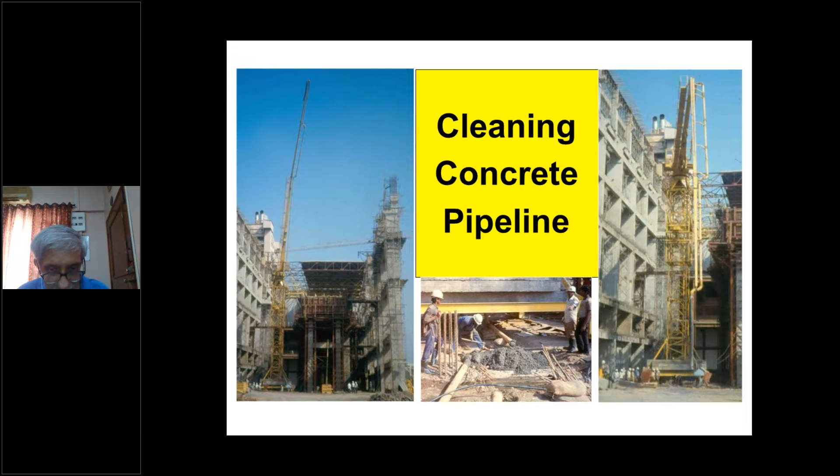He was slightly happy, but then never bothered. He had always one cubic meter thrown out instead of making the curbs. But there are solutions. You can work economically also. You just have to use your common sense.

The blowing-out operation then continues. After you have removed the concrete by vertically positioning the placer boom, then you put a paper plug and a pipe. The plug, the ball.

Behind the ball you push compressed air. The concrete plug is pushed by compressed air till the end. There is a basket for safety. Sometimes what happens, ingredients like aggregate shoot out of the pipe and may hurt some people. So we have one paper plug, a catch basket, then a sponge, and then the compressors, so nobody gets hurt.

After that, you do the line washing with water. So there is a column of water connected between the first ball and the second ball, and then the entire line is clean. The entire line gets completely clean.

Mind you, if you don't do this extensive operation, which is not very difficult, you can really land up with chokes and problems the next day when you do your concreting.